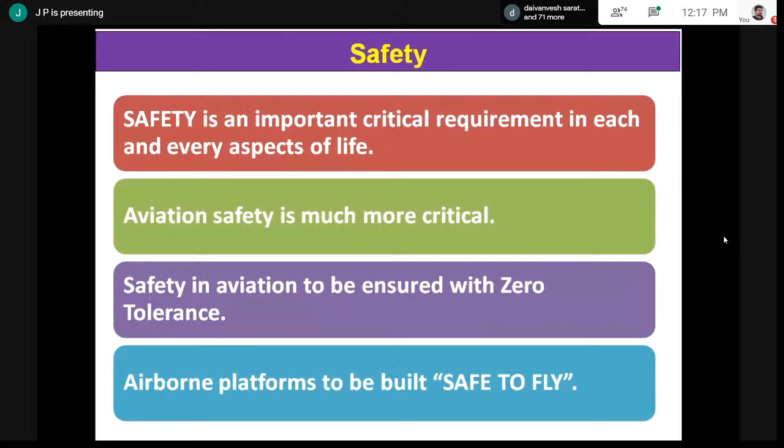The product must be airworthy. The product, in the sense of the aircraft or helicopter, it must be airworthy. Airworthy means fitness to fly. If you take our vehicle to the RTO office, two-wheeler or car, they certify your vehicle is roadworthy and give a certificate. Similarly, our flying vehicle, the aircraft or helicopter, should be airworthy, that is fitness to fly.

The product is to be certified by an external agency, meaning other than the designer, other than the manufacturer, other than the maintenance engineer. The external agency has to audit your design and certify the product.

The product shall be highly reliable and built with components of high reliability. Take today's Boeing 777: it takes off from Bombay or Delhi, goes to New York, about 19 to 20 hours of non-stop flight. Imagine what safety has been built in, so that similar safety has to be built into each and every system of the aircraft.

It requires a high degree of quality control. At each and every stage, there should not be any deviation without anybody's knowledge. That quality control is a very important stage in all aspects, right from design till delivery, and finally with the operation of the aircraft.

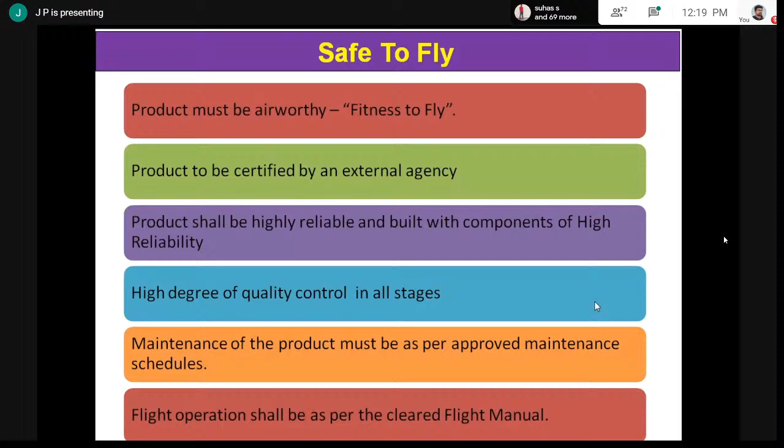Why airworthiness? I told you, if you want to ensure safety, it should be airworthy. Flying is a hazardous mode of transport, as you are all aware. An aircraft or helicopter is assembled with thousands and thousands of machined parts, and with thousands of machined parts, no machine can be designed which never fails. One day, something or the other will fail.

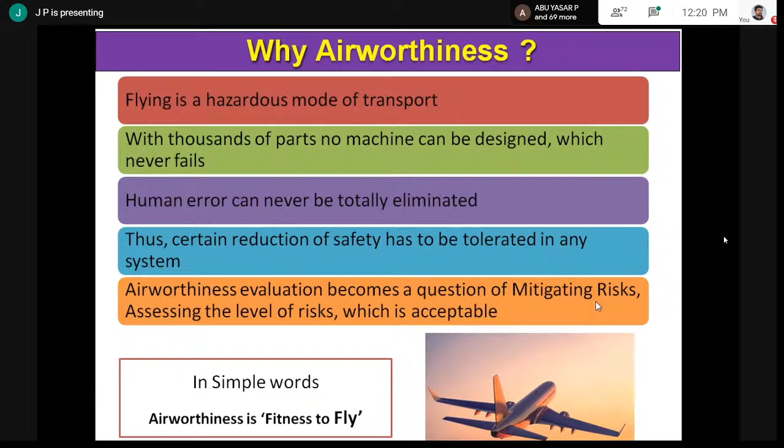And with any amount of systems in place, human error can never be totally eliminated. Thus, a certain reduction of safety has to be tolerated in any system, either in day-to-day activities or any other industry, or in aviation also. Airworthiness evaluation becomes a question of mitigating the risk and assessing the level of risk which is acceptable. In simple words, airworthiness is fitness to fly.

The international airworthiness agencies are the FAA in the USA, and the Ministry of Defense in UK, France, Russia. In India, for all civil aircraft, DGCA takes care of it. For military aircraft, the Center for Military Airworthiness and Certification, CEMILAC, will take care of the airworthiness and certification, and quality assurance is by DGAQA. What is CEMILAC?

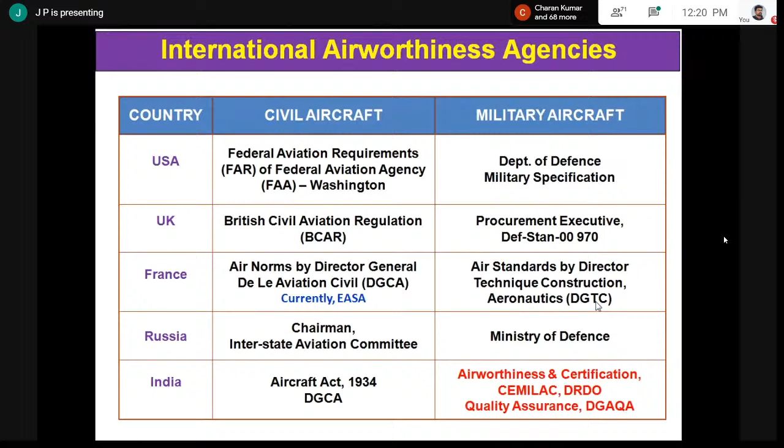The Center for Military Airworthiness and Certification is one of the DRDO organizations assigned with the responsibility of ensuring the airworthiness and certification of airborne systems for military use. Any system developed by DRDO or PSUs like HAL and BEL, or private organizations, has to be certified by CEMILAC before the product is inducted into military service.

There are 18 RCMAs under CEMILAC spread across the country, giving airworthiness coverage for certification activities. Systems developed by government organizations like DRDO or CSIR, PSUs like HAL and BEL, and private sectors, have to be certified by the RCMA and CEMILAC before use in aircraft, helicopter, and aero engine.

CEMILAC accords clearance even after giving a certificate, for life extensions, mid-life upgrades, and modifications of licensed-built and bought-out aircraft, helicopters, and aero engines. In India, there are several aircraft and helicopters that are built under license, built to print, and bought straight away. For those platforms also, CEMILAC has to give clearance to ensure the continued airworthiness in the above aspects.

CEMILAC and RCMAs adopt a concurrent certification methodology, meaning they work with the designer right from the project stage onwards for certification of all items.

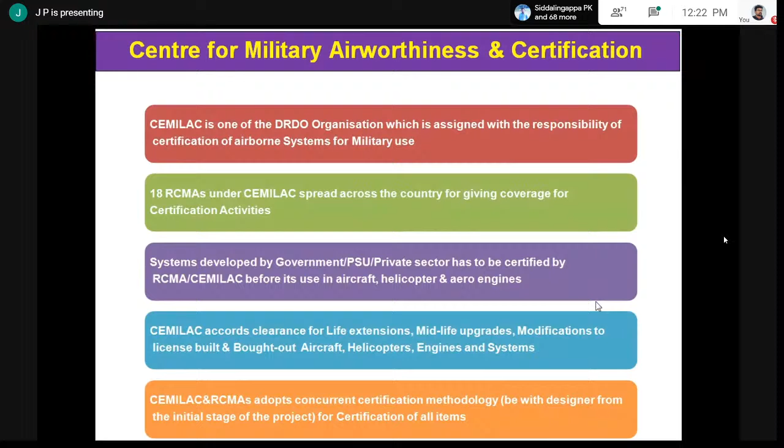There are 18 RCMAs located across the country giving airworthiness coverage for all developments happening at various centers. CEMILAC is the corporate office, located in Bangalore.

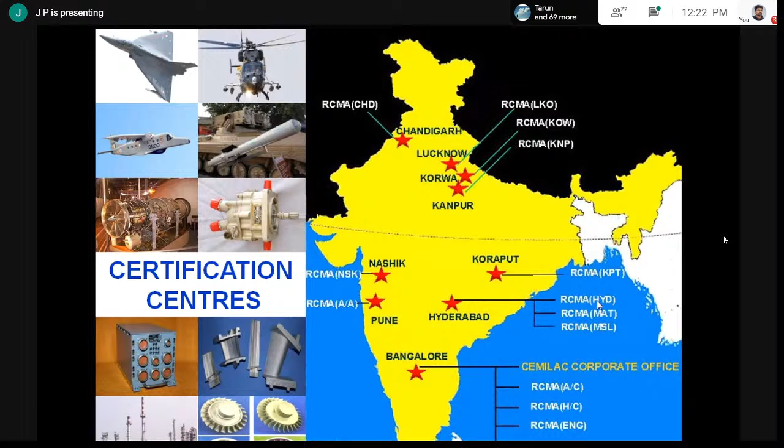What is the charter of duty? CEMILAC gives design clearance and certification for indigenously designed and developed aircraft, helicopters, and systems. Taking LCA, Advanced Light Helicopter, Light Combat Helicopter, Light Utility Helicopter, HTT-40 trainers, and the engines developed by GTRE and others — for all these products, CEMILAC has to give design clearance as well as certification.

Once certified and delivered to customers, CEMILAC ensures continued airworthiness till the product is retired from service. This continued airworthiness is ensured for indigenous aircraft like LCA, ALH, etc., license-built aircraft like Jaguar, MiG-21, MiG-27, Su-30, and helicopters like Chetak and Cheetah, and bought-out aircraft like Mirage 2000, Jaguar, and the presently inducted Rafale aircraft. When buying these bought-out aircraft, the technology is advancing in a rapid way.

Therefore, in order to keep the operational fleet up to date, you have to carry out modifications and upgradations, and for that also CEMILAC is giving clearance.

Due to commercial reasons, some bought-out aircraft are provided with a limited life, even though potential exists. So in order to utilize the full potential, we carry out some exercise and give life extension. The life extension clearance is accorded by CEMILAC.

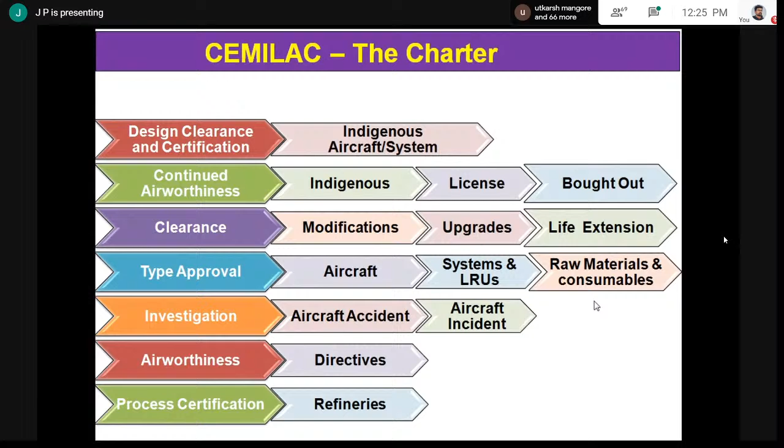And the Directorate General of Aeronautical Quality Assurance Organizations, DGAQA, is located in Delhi. Under the DGAQA, regional offices are located, and wherever CEMILAC is there, they are located too. Their aspect is quality inspection, conformance to standards, process, etc.

Quality control and acceptance of airborne stores. As I told you, quality control has to be ensured, and at each and every stage of development their involvement is there. What is quality?

Doing the job right first time and every time is the requirement of quality in production. If you do this, the product we are manufacturing, certifying and delivering will have high quality and high reliability.

This quality involvement and quality control leads to reduced levels of non-conformance and scrap, which results in higher productivity. If quality control is not applied at each and every stage, and only at the last moment you inspect and find it doesn't meet requirements, you reject it, and that becomes a loss to the management and everybody. So involvement of quality control from the design and development stage itself reduces non-conformance of the product.

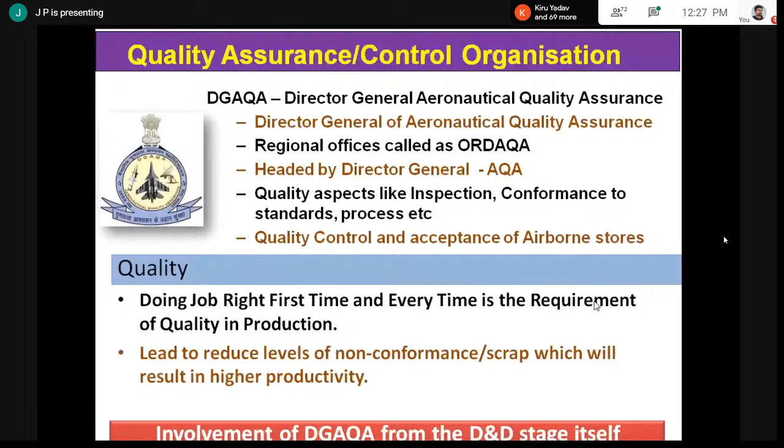I told you about safety. Safety means fitness to fly. Fitness to fly means the product has airworthiness. What is airworthiness? It applies commonly to a helicopter, aircraft, or any system. Airworthiness is defined as the capability of an aircraft, helicopter, or system to perform its intended mission. What is the mission?

If it is a passenger aircraft, it has to take the passengers and cargo, take off from Bangalore, go to the nearest airport, land safely and bring them back. That is the mission, within the cleared envelope and specified life, under all operating environmental conditions, with an acceptable level of safety and reliability. This is the definition for aircraft.

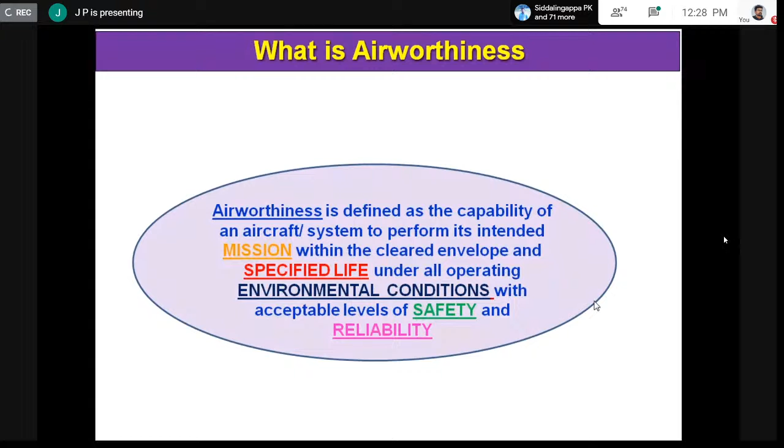There are some aspects: mission, specified life, environmental conditions, safety and reliability. All these things have to be ensured during design till it is certified. How are you going to ensure this? If we look at the mission, there are various activities required to see these aspects are met.

Mission requirement means performance and satisfactory function of the system. If you fulfill this requirement, you can say the system can perform the mission satisfactorily.

Specified life: if you see any aircraft or helicopter, you cannot use it permanently forever. It has got a specified life. If you see LCA, it is designed for a specified few thousands of hours of life. As and when it completes that, it will be retired from service.

Similarly, a passenger aircraft will be cleared for thousands and lakhs of flight hours. If you see Boeing 777, it takes off from Bangalore, goes to New York, lands within 4 to 5 hours, changes crew, and flies back. If you count the number of hours, it will be lakhs and lakhs of hours.

So for that, what do you have to do? You have to carry out endurance testing and fatigue testing to decide about the life.

The environmental conditions: the product you are designing, developing and using has to meet high and low temperature, high altitude, humidity, vibration, acceleration, environment, EMI/EMC, and lightning protection requirements. To meet all these requirements, the product being developed has to undergo testing under all these conditions.

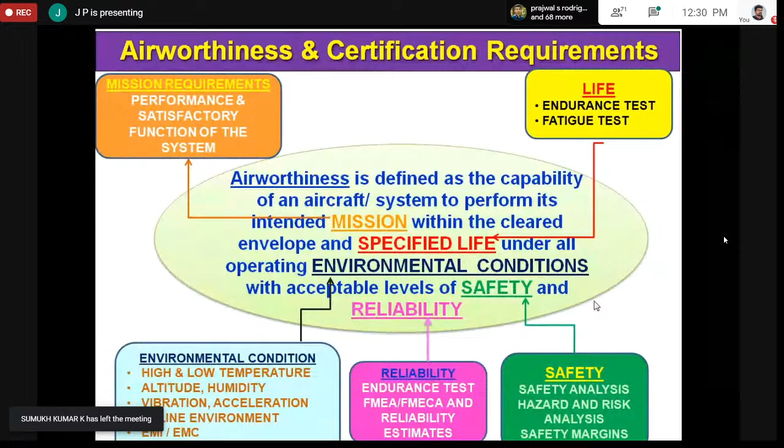Then safety, you have to carry out the safety analysis, hazard and risk analysis, safety margins, all those things. Finally, reliability, endurance of the product, FMEA, FMECA, and reliability estimates. By carrying out all these activities, you will say your product is airworthy.

If you see India, the dry and cold regions in Siachen go up to minus 55 degrees centigrade. Dry and hot region at Rajasthan plus 52 degrees centigrade. Humidity at the hot, that is 50 degrees centigrade and greater than 99% relative humidity. Sandstorms, salines, high altitude airfields like Leh and Siachen, heavy and continuous rainfall. The product what you are developing by DRDO, by HAL, is operating across the country, so it has to be cleared to operate in these adverse weather conditions.

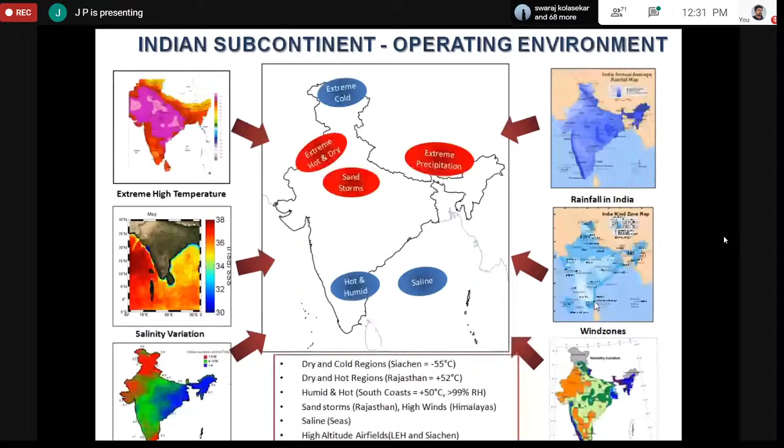For that, each and every system has to be exposed to this kind of extreme environment and tested to say the product is airworthy. Airworthiness is a continued capability of a product to perform satisfactorily and fulfill mission requirements throughout its specified life in the prevailing environment, with acceptable levels of safety and reliability.

Certification is a declaration of conformance to the standards and specification of the product. End of the day, when any system is cleared, the CEMILAC or RCMA will give a certificate. Airworthiness is the explicit declaration that the product, be it an aircraft or helicopter, is certified to be airworthy. If CEMILAC gives airworthiness clearance, you can say the product is airworthy, all safety norms are ensured, the flight is airworthy, safety is ensured.

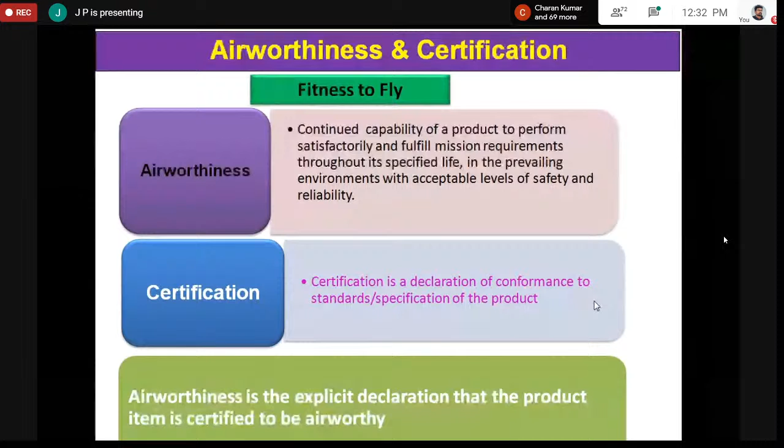How are you going to do all these things? If you see the methodology for certification, the requirements come from the end user. In India, that's the Army, Air Force, Navy and Coast Guard. In the form of a joint services qualitative requirement, a specification comes. This specification has to be converted - based on the requirement, HAL, DRDO, whoever has to develop an aircraft. All these requirements will be converted into a technical specification.

After finalizing the technical specification, the design evaluation starts. You are doing the detailed design - preliminary design, critical design - for aerodynamics, structure, systems, system integration, performance, and all the analysis like FMEA, criticality analysis, simulation, static and dynamic testing, software, IV&V testing and documentation. This goes on, and majority of the time, about 7 to 8 years, will take place.

You are designing a system, it undergoes a series of reviews, you have to manufacture a prototype and do the ground test and other simulation tests. The day it meets all your safety requirements, the regulatory agency will give the clearance for the first flight.

After meeting all the system safety requirements, when the prototype first flight starts, it carries out flight testing at various environments, as I told earlier, right from sea level to high altitude, various extreme environmental conditions - the flight testing is carried out.

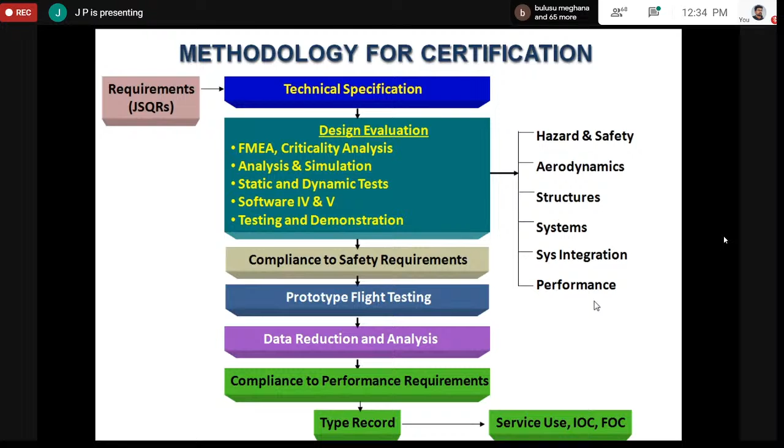The type record is submitted to the regulatory authorities like CEMILAC. Then they give clearance for service use in the form of Initial Operation Clearance or Final Operation Clearance. Based on this IOC and FOC, our services - Army, Air Force, Navy - will get the product from HAL and use it for safeguarding our nation.

I told you about the product life cycle - the conception, right from the requirement from the joint services, then conception, design and development, testing and delivery. Based on the clearance or FOC - Final Operation Clearance given by CEMILAC - you manufacture and give the product to the services. But the matter does not end there.

Thereafter, you continue airworthiness activities until retirement of the product. Whenever during operation some kind of problem comes, you have to repair the system, maintain the system. As technology advances, you have to upgrade the system to the latest technology, and finally, retirement.

So CEMILAC, the certification agency, shall be involved throughout the entire development, beginning with the requirement that comes from the services and continuing till the retirement of the aircraft, aero engine, airborne store, weapon, etc.

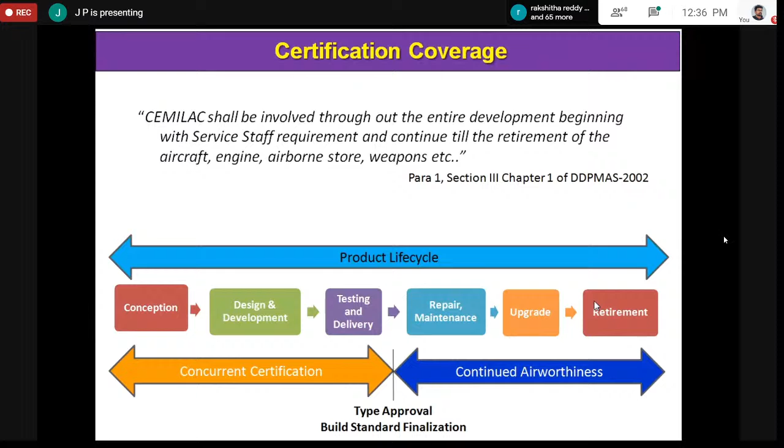Now, the requirement comes from the services. It goes to the DRDO organization, ADA, DPSUs, BEL, HAL, and private organizations. They are the design, development, testing, and manufacturing authority. The certification is CEMILAC, and quality control is DGAQA. Finally, it has to go back to the users, the Navy, Air Force, Army as operators.

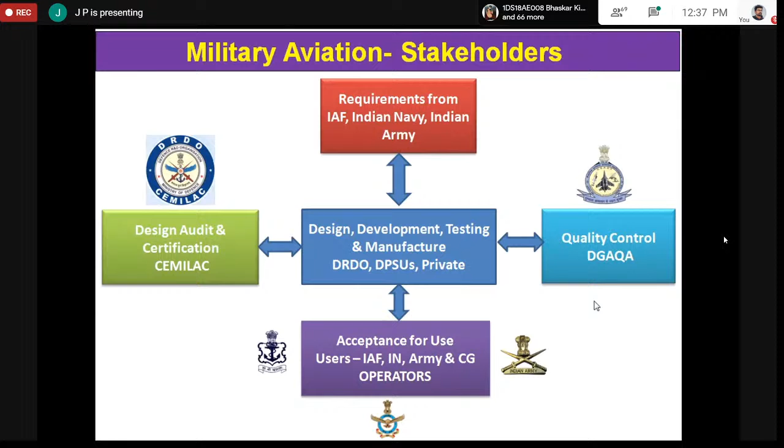Now, each and every organization has to play a role. Just because these authorities are available with external agencies CEMILAC and DGAQA, they cannot ask for more, and they cannot ask for less. All these organizations have to follow a guiding document, so that each and every organization plays within their roles. That is called the guiding document.

DDP MAS, the document on design, development, production of military aircraft and airborne stores. This guiding document talks about the roles and responsibilities of the designers, the manufacturer, the certification authority CEMILAC, the quality control authority DGAQA, the flight test agencies, and users and operators.

If anybody is deviating from this document, they can clearly say it is not as per DDP MAS, you are asking for more. This document is approved by the Secretary R&D DRDO and the Secretary of Defense Production. This is a guiding document being followed by each and every organization.

This document talks about concurrent airworthiness, indigenous design and development, licensed projects, bought out aircraft, development flight testing, and user flight testing.

This is volume 1. Volume 2 talks about software. Today, all our systems are software oriented, so there's a separate volume for software certification, and there is also DDPMUAV for unmanned vehicles.

Some time back, we released this document in 2002. It was available for sale at the English Book Store, Connaught Circus. When I was in helicopter, this document was purchased by many foreign countries.

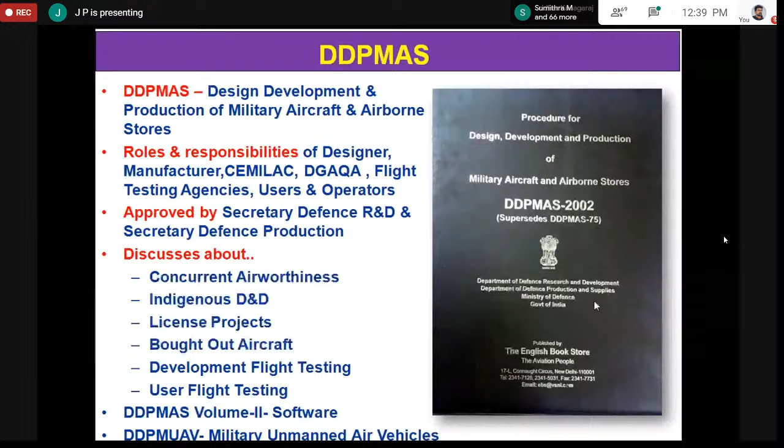It is being followed even abroad by those doing some kind of activities on our Indian platforms. This is the guiding document. It will be available in all the institutions wherever the design and development of aircraft and helicopters are happening.

Whenever you are developing any product, there are different stages. From the beginning itself, you evolve a route to certification. For anything, if you start, you have to go to the destination, there is a route. So there is a feasibility study on ASR, NSQR, GSQR.

Now with the advent of internet, services can go online and select what is best available in the country, and put it all together to ask for it. Finally, you have to see whether it is feasible to develop or not, because putting all the state of the art together, sometimes it may not be feasible. So there is a feasibility study on the requirements stipulated in the ASR, NSQR, GSQR.

Then that requirement is converted into a technical specification, which has to be approved by all stakeholders: the designer, the certification agencies, the regulatory agencies, and the user. There is no controversy even after 5 or 10 years as technology changes, because the technical specification has been approved by everybody.

Then the design starts: design evaluation, preliminary design review, critical design review, and various iterations. Thereafter, you start manufacturing your LRUs, the line replaceable units systems, and you undergo various levels of testing, system level testing and aircraft level testing.

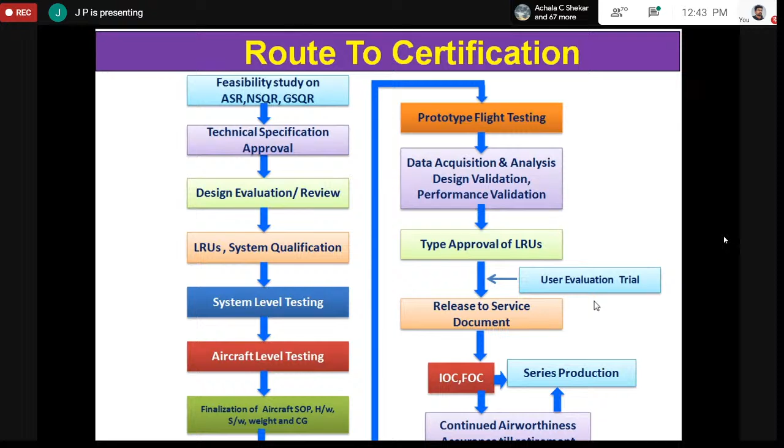Finally, when it meets all the requirements, the release to service document will be issued by CEMILAC, in the form of initial operation clearance and final operation clearance for series production. Based on the IOC and FOC, multiple numbers are manufactured and delivered to the Indian Air Force. And of course, the continued airworthiness assurance will start from there also, till the retirement of the platform.

Now, if you see any design criteria for the aircraft or helicopter, you have to design each and every system with reliability. Like I told you, Boeing 777s do 20 hours non-stop flying, and after a 4 to 5 hour gap come immediately back. So how much reliability has to be built into each and every system?

And the damage tolerant fail safe. Nowadays we are using several composite structures. The composite structure is called damage tolerant. So a little amount of fail has to be tolerated. That's for damage fail safe.

High TBO life. Each and every aircraft, the day you build it, has to undergo an overhaul within a scheduled interval. That is called designing for high TBO life.

Then any product has less vibration, less noise, and crashworthy features. In the fighter aircraft, whenever you are in an emergency, you try to save the aircraft. If not possible, you can eject it — you can leave the aircraft, come out, and land safely.

Whereas in the helicopter, no, that is not possible. You have to eject, but that's very cumbersome — you would have to eject the rotor and everything, which is not possible. So when there is a high level impact, the helicopter structure and the seat will take care of the crash. The crashworthy features are built in.

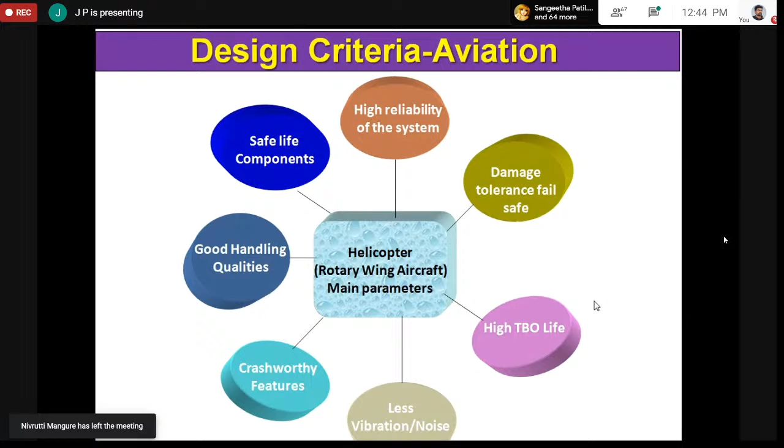Good handling qualities are applicable for fixed wing and rotary wing, and safe life components. You are familiar with fail safe and safe life. This is the design criteria for any product in aviation.

Now, airworthiness in the design. When you are launching any design, whether it's a passenger aircraft, a fighter aircraft, or a helicopter, you have to estimate the load coming on each and every component accurately. If your estimation is wrong, it will show up in a different form of failure at a later stage.

So the starting point is your estimation of the loads using the wind tunnel and other tools and software. That will be very, very accurate. And after this, you ensure airworthiness parameters during the design itself.

When you go to this, you might be familiar with the factor of safety. If 100 kilos is coming on any component in the actual scenario, you design to a design load with a 1.5 factor of safety. Thereafter comes the margin of safety.

This margin of safety, in any analysis or any data, should always be positive. What is margin of safety? It's the capability of the structure — the ratio between the capability and the stress, minus 1. Okay, it should always be positive.

If we see any construction, it has got casting, welding, joints, and composite structures. So in the design itself, you have to take care of that. If you are using ultimate tensile strength, whenever you are using a welding structure, you have to apply the weld factor, casting factor, joint factor, and the environmental degradation factor for composites.

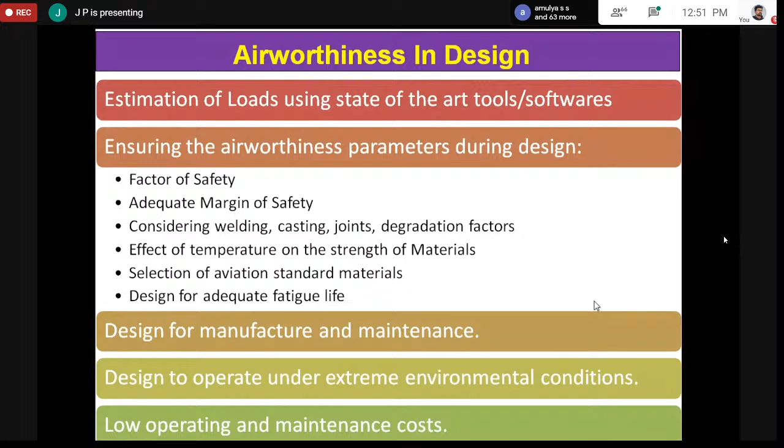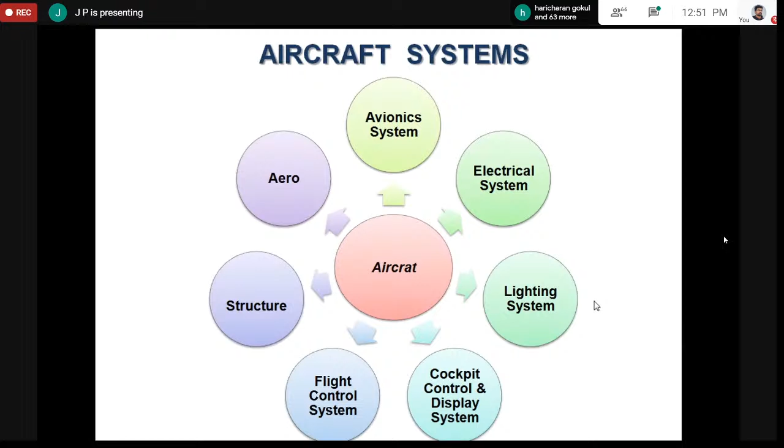If you see the aircraft system, any aircraft has varieties of systems: aerodynamics, structure, flight control, cockpit and control display system, lighting system, electrical system, avionics system, power plant, fuel system, hydraulic system, landing gear, brake management, environmental control system, life support, armament, escape system, brake parachute system. The whole aircraft is divided into individual systems.

Each individual system has to undergo component level, subsystem level, and system level qualification testing. When it meets all the requirements, they are all put together and then you do testing. That is the airworthiness requirement. Today's LCA PC has 365 systems installed on the aircraft. You cannot build an aircraft installing all the systems and directly go for the first flight. No, each and every system has to undergo qualification testing individually.

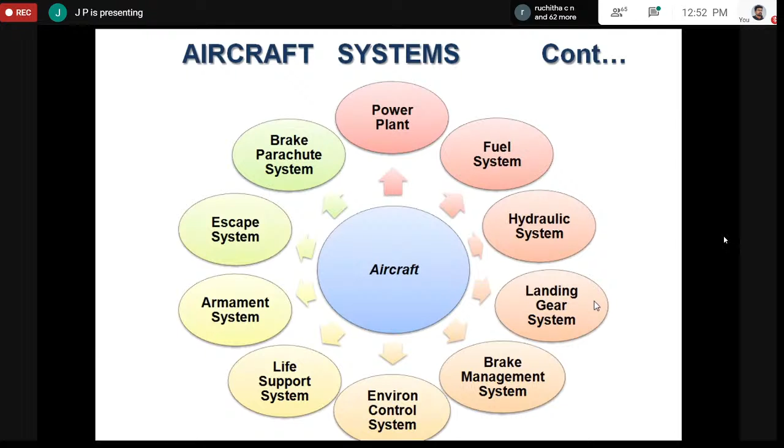The day it meets the requirement satisfactorily, CEMILAC will give the approval. That is how you maintain airworthiness and safety.

I'll tell you a typical procedure followed in the aeronautic houses for certification of a mechanical system. First of all, in an aircraft there are some critical systems and some non-critical systems. I cannot ask for very stringent qualification testing for non-critical systems, and similarly I cannot do very minimal qualification testing for a critical system. This is very important to understand.

In a system of an aircraft, the various systems, the structure, the classification of the items, whether critical or non-critical, is applicable for a system, for LRUs, for components, and each and every component. To classify the system, we follow the system safety assessment approach for classification of the item.

What does the system safety assessment approach say? A critical item is one whose failure will affect flight safety. Very simple - if in an aircraft or helicopter, while flying, any failure of the system will affect flight safety, then you know what will happen. That is a critical system.

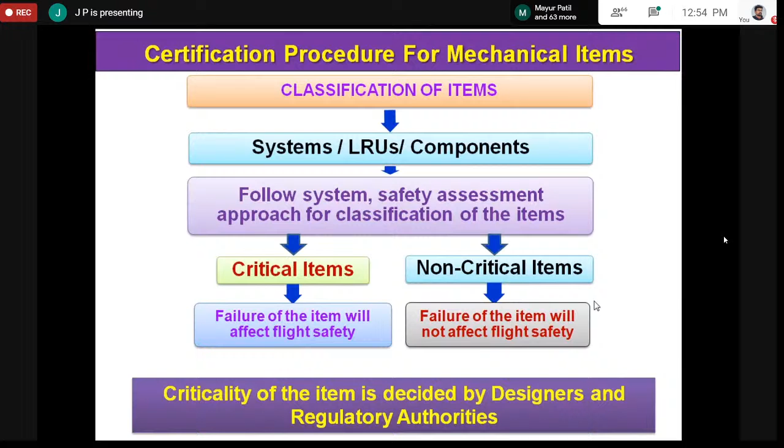The criticality of the item is decided by the designers who design the system, and the regulatory authorities - I mean the CEMILAC. They decide which is critical and which is not critical, and what kind of qualification testing a critical system or a non-critical item has to undergo. It is a mutual understanding between the designers and the regulatory authorities.

Now I'll give one example. This is CEMILAC on the left side, the certification agency, and the contractor - could be DRDO, HAL, BEL, or a private company. Both of them first have to understand what is the requirement of the system.

What is the system for - say, a landing gear. What is a landing gear supposed to do? A flight control system, what is it supposed to do? Once you understand the system requirement, you have to evolve the specification and get approval of the specification.

Once the specification is approved by both the designer and the certification agency, there will not be any confrontation at a later stage. Once the specification is approved, the design starts, along with analysis of the design.

There's the preliminary design review, then the critical design review, then parallelly they prepare the drawings - what material to be used, what process to be followed. All these things will be approved by CEMILAC, and finally they evolve the qualification test schedule.

It is a concurrent approach between the designers and the certification authority. They sit across the table, discuss, and come to an agreement. That's why at each and every stage, both parties are in close interaction with each other.

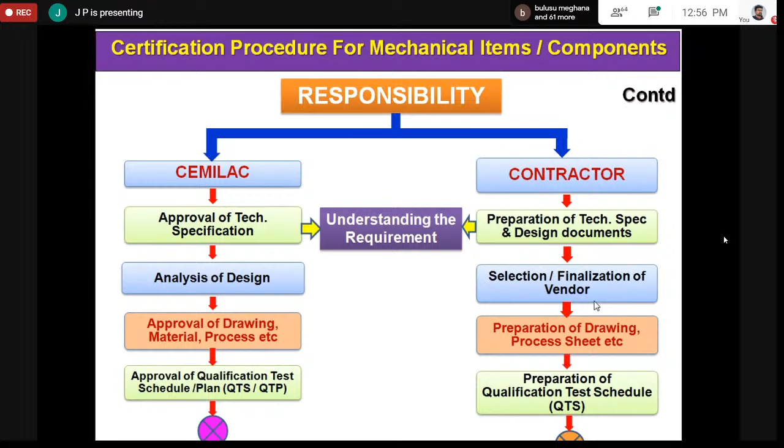The DGA will come into the picture. They will see the prototype drawing or process approved by CEMILAC between the designers and CEMILAC, and the first sample article produced by the manufacturer will be inspected by quality control, the DGA.

I mentioned that involvement of DGA right from the beginning will reduce non-conformance. That is why their involvement is there throughout.

Then, once they clear it, the sample will be tested at the approved test house. Any developer, whether HAL or any private vendor, may not have all the facilities under one roof for carrying out qualification testing - they can go outside wherever the facilities are available.

Nowadays, many private labs have NABL accredited laboratories with their own test facilities. The product can go there, get tested, and receive a certificate. This is coordinated between the quality DGAQA, and based on the test, after carrying out all the tests, the contractor will prepare a qualification test report.

Again, it has to go through DGAQA coordination, so that DGAQA is fully in the picture. He will ensure the sample is manufactured as per the drawing, ensure the product is tested as per the qualification test schedule, and ensure the test report prepared by the contractor is in line accordingly. He will coordinate, and the document - the qualification test reports - is submitted to RCMA. RCMA, the RCMA CEMILAC, will go through the test reports.

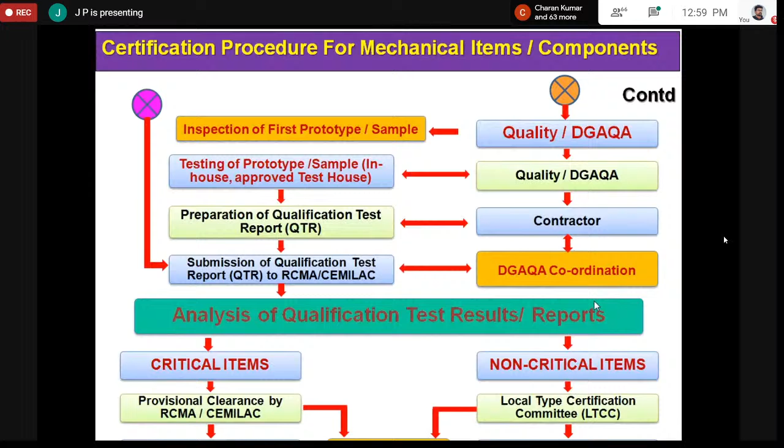This is everywhere, the methodology and procedure is the same. Only the variable is the requirement in the qualification test schedule, depending on the critical item. The number of tests may be less or more, purely based on how critical the system is, but the procedure is the same. Today, modern systems are mostly avionics and software oriented, and they are also safety critical and mission critical.

If you see the LCA DFCC, the digital flight control system is a critical system. If you see any safety critical item, any weapon delivery or other system, that is mission critical. If you see the procedure now, it is the same everywhere.

Specification, design reviews, finalization of drawings, bill of material, finalization of QTS, SOF, environmental screening, qualification testing, limited qualification testing, analysis of QTR - everything is the same for mission critical as well as safety critical systems.

But the software certification has to be carried out much before the first flight testing for safety critical systems. Whereas for mission critical systems, based on functional testing, they will give the clearance, and after completing flight testing, you can do software certification also.

That is very critical, because today in an AFCS flight control system, this is software driven. If at all there is any bug in the software, you know what the implications are. So the software also has to undergo testing.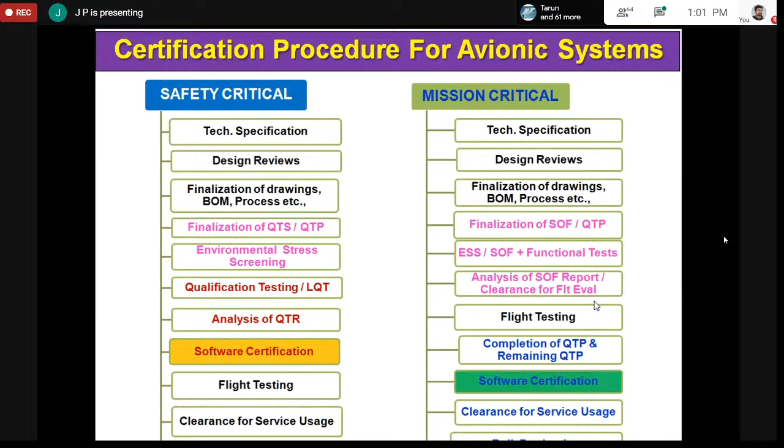A separate volume is there for software certification, then flight testing, again the clearance for service use and bulk production. Here also, it's the same procedure being followed for avionics systems that are critical, say mission critical. This is the software certification process.

In the software domain, some of you may have come across these kinds of requirements - various requirements for software development, software certification, and documentation. This also depends on whether it's safety critical at level A, level B, level C, or level D. There's an international standard, RTCA DO-178B, that talks about various levels of certification for software, and this is being followed by all aeronautical institutions in India.

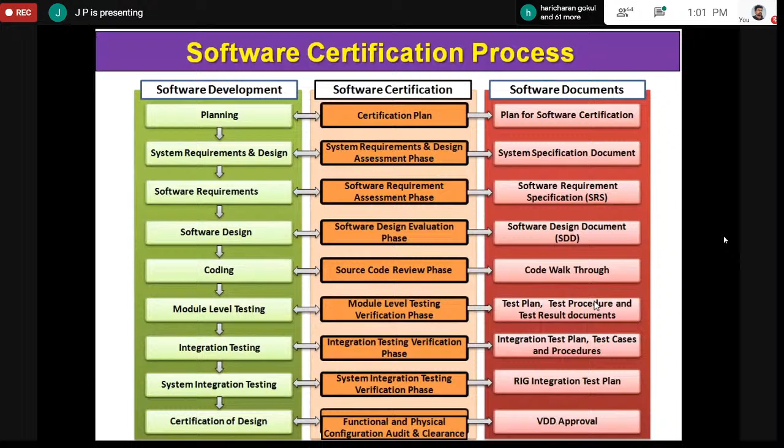I told you about all these different stages - right from the requirement that comes from the services, then those things get converted into specification. Based on the specification, you estimate the load, do the design, analysis and production, and then do the ground testing.

From the ground testing, you evaluate the flight allowables, and when it is meeting the safety requirement, CEMILAC will give the first flight clearance for flight testing, and thereafter flight testing will start. You measure the various loads coming on critical components and compare with the design, whether the measured loads are as per the design or not, and compare with the analysis, and finally for the entire product you see the design validation and documentation, and finally the operational clearance to the services is issued by CEMILAC.

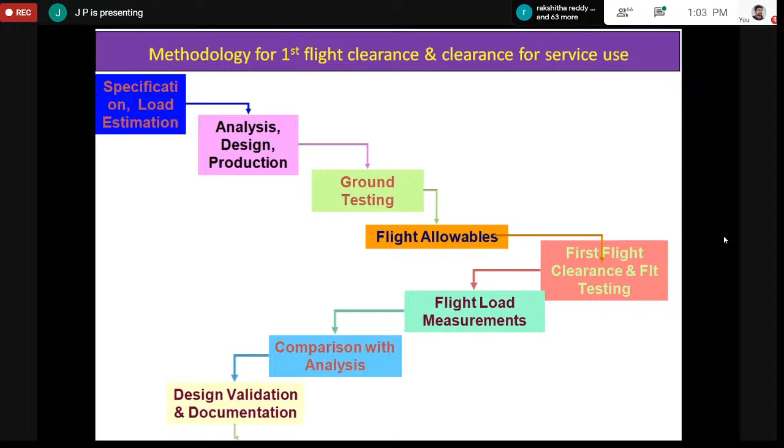Now, what does the clearance talk about? Each and every system will be given clearance separately. If it's a landing gear system, the landing gear itself will have its own independent clearance. So what CEMILAC does is give clearance to the part number, part name, and the clearance talks about the details of the approved drawings with issue numbers.

The drawing also they will approve, and once you get the clearance, you cannot change the drawing on your own - the specification of the material, alternate material to be used, all of that. During the prototype, you may use one material, and it will undergo all the qualification testing.

You will meet the requirement and get the clearance from the certification authorities. During bulk production, when you go to market, the material may not be available, but you cannot use the material as per your own choice. The drawing also specifies what material is to be used, and what the alternate material to be used is. If both are not available, you cannot use any material on your own.

Thereafter, during bulk production, when the DGAQA comes, they will say, show me the drawing - what material you are supposed to use, what material you used, please show me the records.

You have to use the correct interlinked material. Then the process, what kind of heat treatment, coating, finishing to be followed during manufacturing of all the components. Acceptance criteria, permissible manufacturing tolerances.

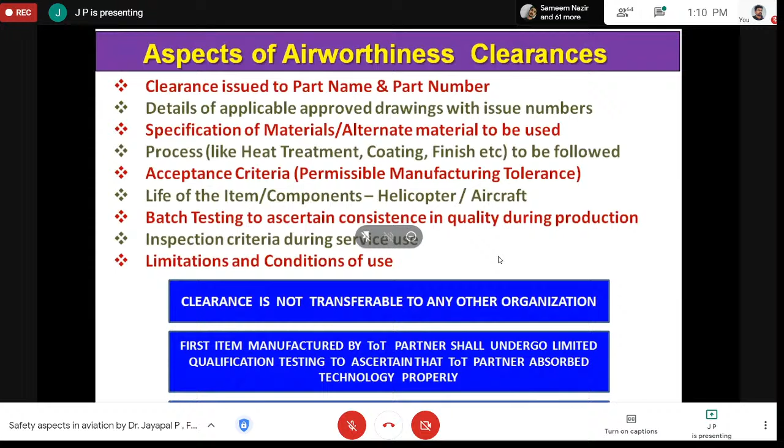Even though it is a rivet, it has to undergo qualification testing to the requirement as per the standards, and a clearance will be issued to the rivet. Because if the rivet you are using in a critical system fails, the entire system will be in jeopardy - jeopardizing safety and reliability. So what I want to say is, in aviation, each and every component is very, very important. If the rivet you are using in a critical system is critical, the same rivet used in a non-critical system is non-critical.

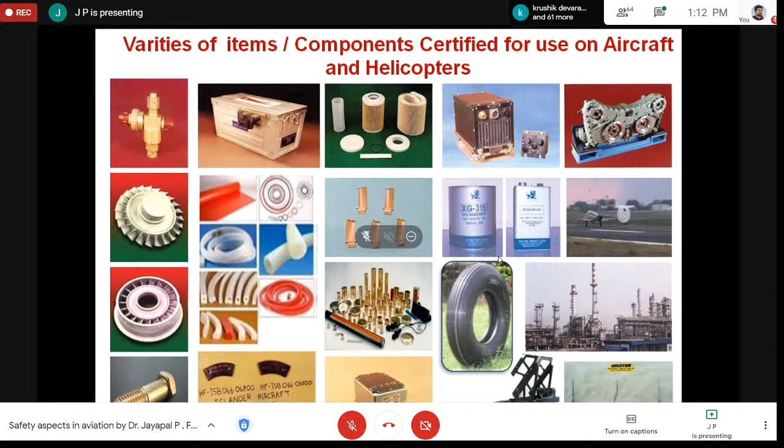Similarly, I mentioned that aircraft, helicopters, upgradation - everything has to be certified.

During a bought-out aircraft, or a license-built aircraft like Jaguar, MiG-21, MiG-27, Su-30, and even a bought-out aircraft like Mirage 2000, when you want to introduce a system, the spare may not be available from the original equipment manufacturer in the foreign country. Just because it is not available, you cannot keep the aircraft on ground. So you have to develop the spares and systems. Yes, you are allowed to develop with the use of HAL or private organizations. The item which is developed has to be certified by CEMILAC for use by services.

The procedure exists, and we have cleared so many systems, several systems for bought-out and licensed aircraft. For everything, CEMILAC has cleared, so as to ensure that the aircraft or helicopter is never on AOG or in want of spares or systems from abroad.

If you see Indian aviation - over 6 decades of experience in India, HAL, DRDO and CSIR are the organizations involved in development of aviation products. If you see our olden days aircraft, it is made out of wood and cloth. Today, the aircrafts are manufactured out of composites, carbon composites.

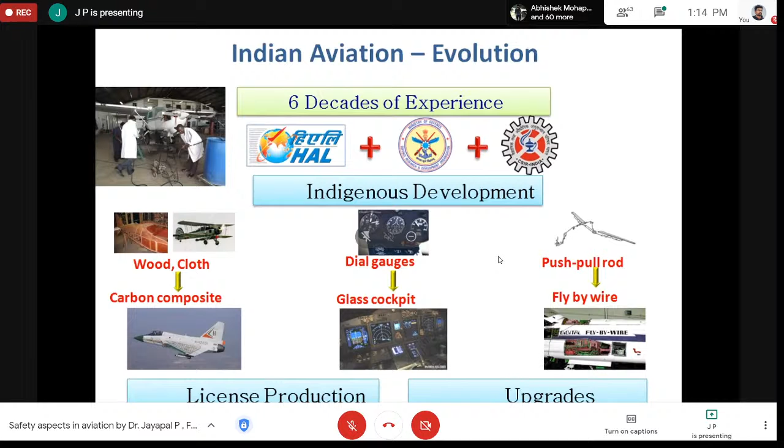Let's see, in 1958 Indian aviation started. In 1958, we were using bought-out aircraft - Canberra, Hunter and Packet. And we have migrated to license production.

License production means the foreign country will give the drawing, the material, the manufacturing process, the assembly process, procedure - everything. We have to build to print and then manufacture to the approved drawings. That is called license production - they give everything, and some of the key systems you will be supplying.

So from there we are migrating and expanding. Today we are in a position to design our own aircraft - AEW&C, Light Combat Aircraft LCA, AWACS, ARC, ALH, LCH, LUH - all of these systems, aircraft, UAV, Rustam, everywhere. Indian technology has advanced so much that we can design and develop to our own services requirement.

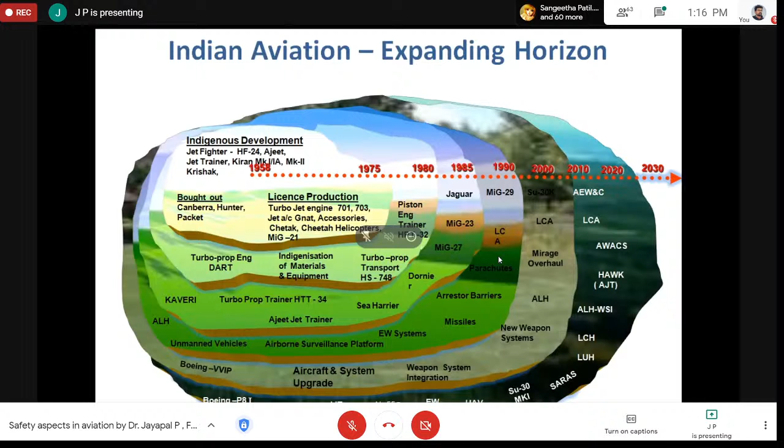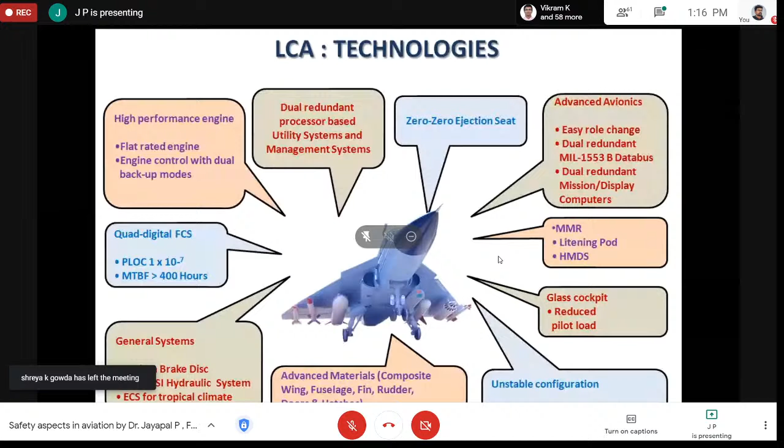The prestigious Light Combat Aircraft, designed and developed by ADA in coordination and association with HAL and many various organizations within India, has been designed with state-of-the-art technologies like zero-zero ejection seat, advanced avionics, glass cockpit, advanced composite materials, and quad digital flight control systems. Whatever technology available today for a 4.5 plus generation fighter aircraft has been developed and incorporated in the LCA.

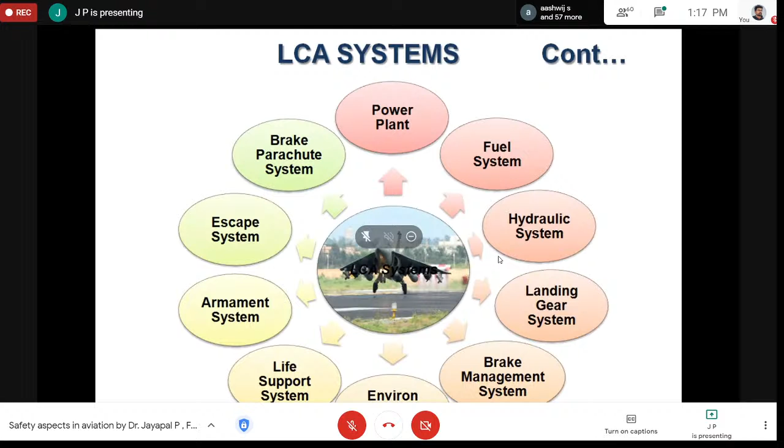I told you the systems, all other systems you have seen earlier. These are the systems: different power plant, fuel system, hydraulic system, landing gear, brake management, life support, armament, escape system, brake parachute - all the systems have been tested individually in each and every rig, ground testing.

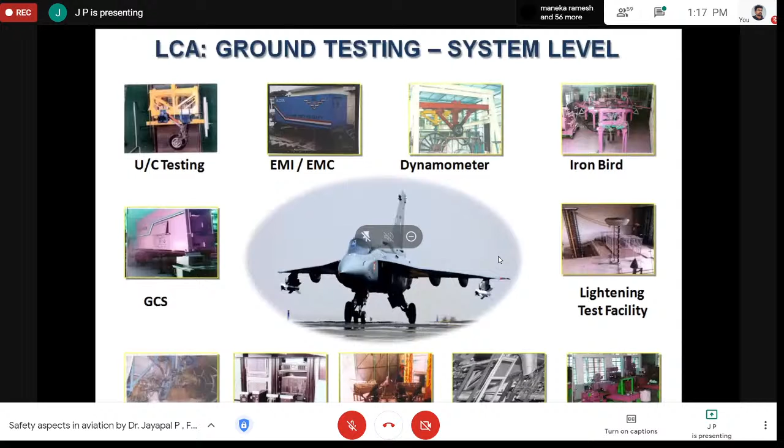As a landing gear separately, Ironbird, lightning facility, each and every system has been tested individually. End of the day, it is meeting the requirement as per the specification. Once it is meeting the specification, CEMILAC will give clearance for the individual system. Thereafter, all the systems have been integrated on this aircraft and the ground testing at the aircraft level.

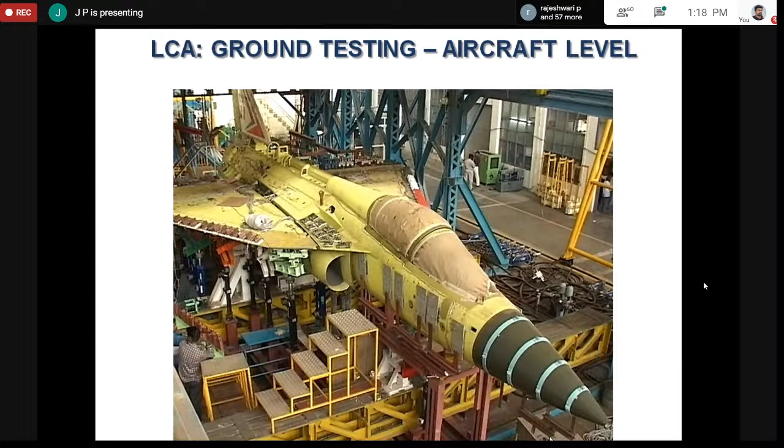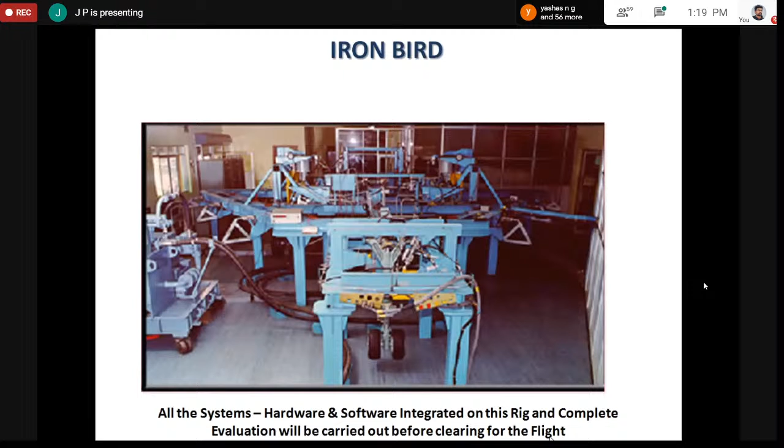Meeting the safety requirements - so once it is meeting the safety requirement before the first flight, CEMILAC will give clearance for the first flight. The flight took place in the year 2001. Thereafter, the series of flight testing is going on: high altitude testing, air-to-air refueling, the bomb release.

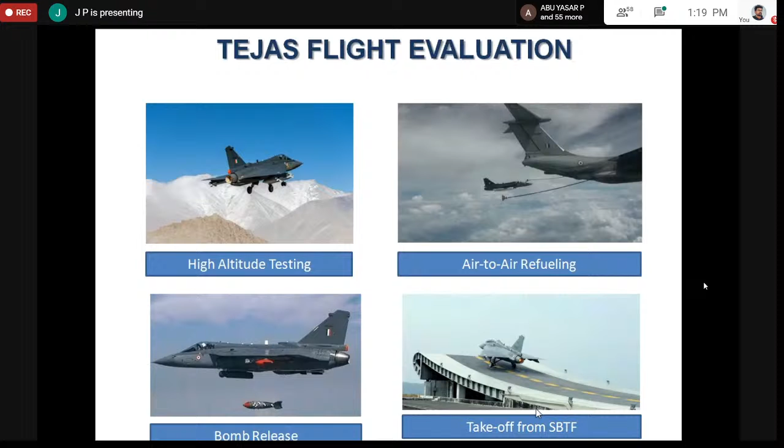It is for the naval version. It has to land on the ship. Before that, it has to be proved on the takeoff and landing from the shore-based test facilities. It is one of the requirements.

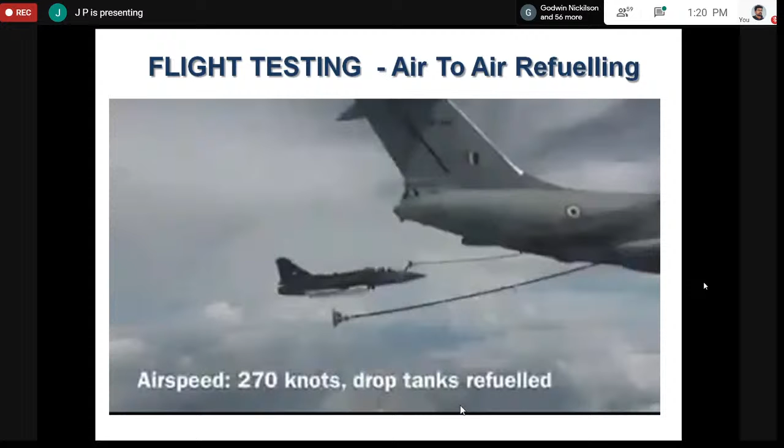Any fighter aircraft, the endurance is limited because the fuel carrying capacity is limited. With that fuel, he has to land for refueling. So to increase the endurance, the mother aircraft in the air, while flying, it will fill the tanks. This is LCA getting fuel from the mother aircraft IL-78 in the air.

So I told you flight testing of the aircraft and helicopters. I told you in the beginning, you decide about the standard of preparation of the aircraft, what is the hardware that has to go inside, what is the software, what are the critical and non-critical systems, and weight. Now, when you are doing the flight testing, you have to do the flight testing at the minimum to the maximum of all of it.

And tomorrow, when you are getting the clearance from the CEMILAC also, that clearance will go to the service also. You will say what is the permissible takeoff weight maximum and what is the permissible minimum landing weight. All those figures will be written in the flight manual. The flight manual will be approved by CEMILAC and the pilots will follow only the flight manual in the squadrons.

When you are doing that, the different all-up weight of the aircraft has to meet all the user requirements. That's why the different all-up weight, different CG conditions - forward CG, mid CG, aft CG - and different speeds, different attitudes, and within the flight envelope of the aircraft design, the VN diagram, the velocity versus load factor diagram, it has to touch the corner point of that flight envelope and carry out the testing within that envelope.

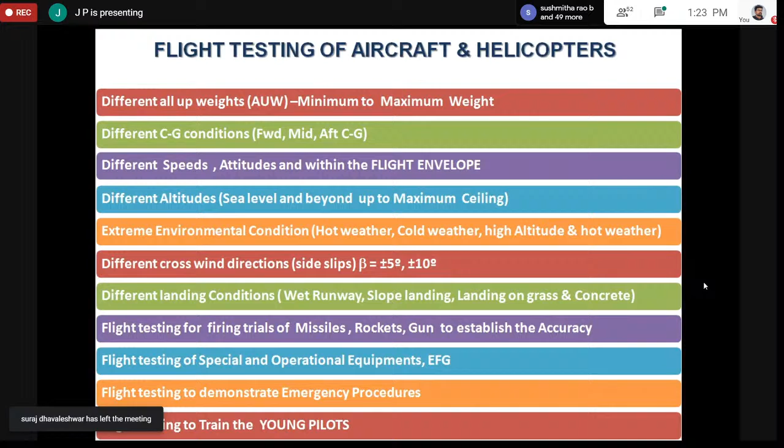Flight testing of the special equipment, flight testing to demonstrate emergency procedure, and flight testing to train the pilots. After carrying out all these, the Light Combat Aircraft was given final operational clearance and released service document for Mark 1 on 20th February 2019 during the air show.

This is a certificate issued by HAL, ADA and CEMILAC. Based on the certificate only, the user will operate the aircraft as per the guidelines stipulated in the released service document.

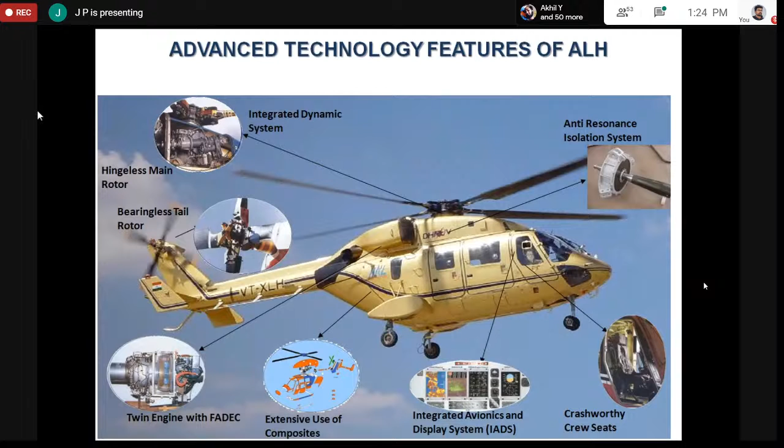Similarly, one of the successful products is the ALH, also indigenously developed with state-of-the-art technologies. I was involved in the project for about 23 years, and I told you about the gearbox.

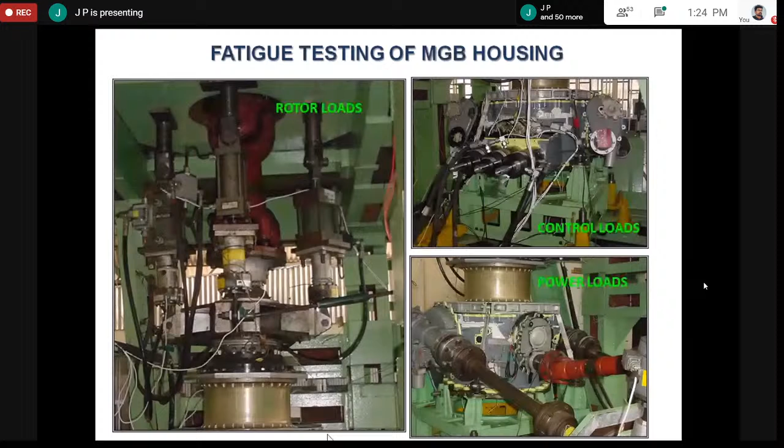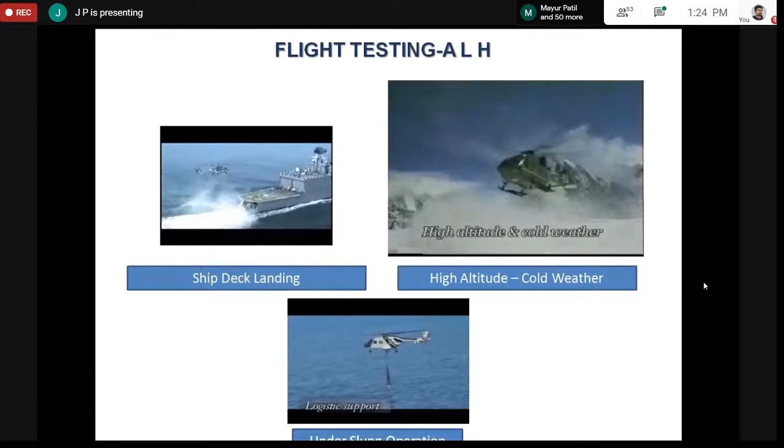This is the flight testing. High altitude cold weather trial. It is landing on the ship.

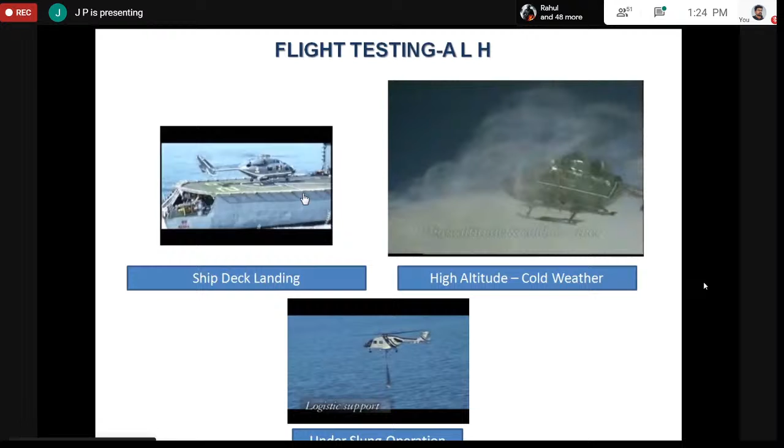And today the prestigious Advanced Light Helicopter designed by HAL is in service with all the services, doing extremely well. These are all the products certified by CEMILAC: Light Combat Helicopter, Advanced Light Helicopter, Light Utility Helicopter, AEW&C.

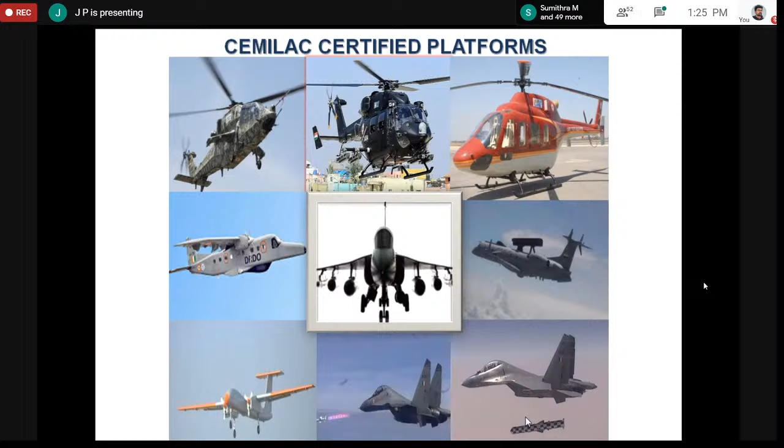LCA, DRDO operating testbed. This is Astra missile firing from Su-30, the integration of BrahMos missile on Su-30, firing trial. CEMILAC has contributed extensively in the integration of the missile and firing from the Su-30 aircraft.

Now, having told you about excellent design, excellent manufacturing facility, excellent quality control, finally, maintenance of the product is very, very important. Even with an excellent design, better quality, and a highly reliable product, we cannot ensure safety if it is not maintained properly as per the maintenance schedule. Follow the maintenance requirements stipulated by design and regulatory authorities strictly.

There is daily maintenance, weekly maintenance, monthly maintenance, yearly and hourly overhaul. Carry out major servicing or overhauling of the system within the time schedule, replacement of items, and use correct consumables. Adherence to the lifing document, replacement of components and items, and proper documentation of the work carried out for proper traceability in the event of any accident or incident tomorrow. You should be in a position to trace back what you have done on the systems.

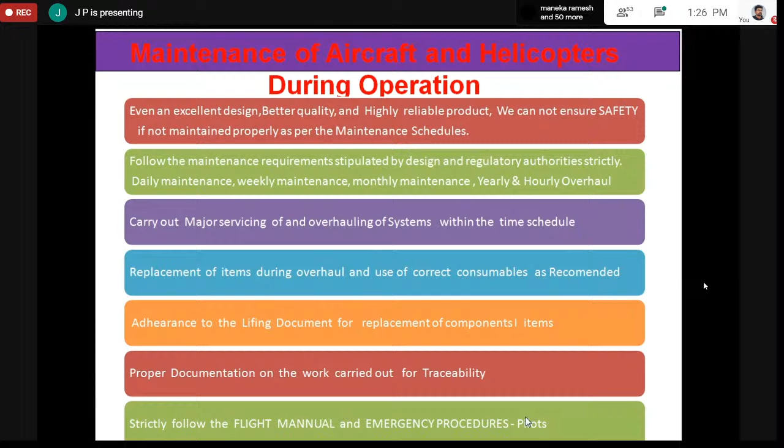Strictly follow the flight manual and emergency procedure. This is for the pilots.

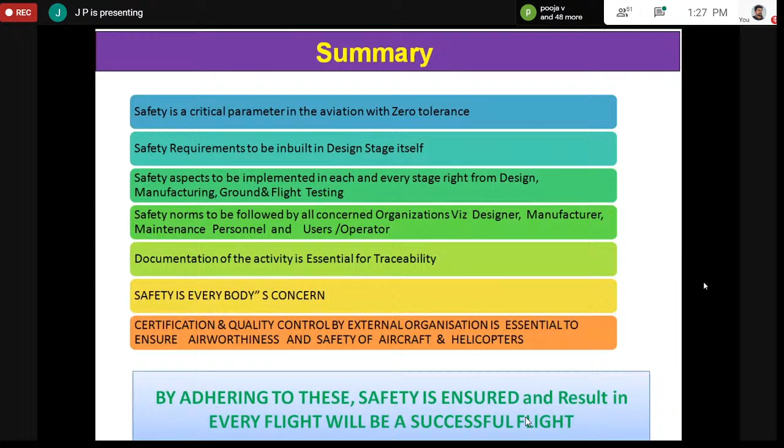In summary, safety is a critical parameter in aviation with zero tolerance. Safety requirements need to be built in at the design stage itself. Safety aspects have to be implemented at each and every stage, right from design, manufacturing, ground and flight testing. Safety norms must be followed by all concerned organizations: designer, manufacturer, maintenance personnel, and finally users and operators. Documentation, as I told you, is very essential. Safety is everybody's concern.

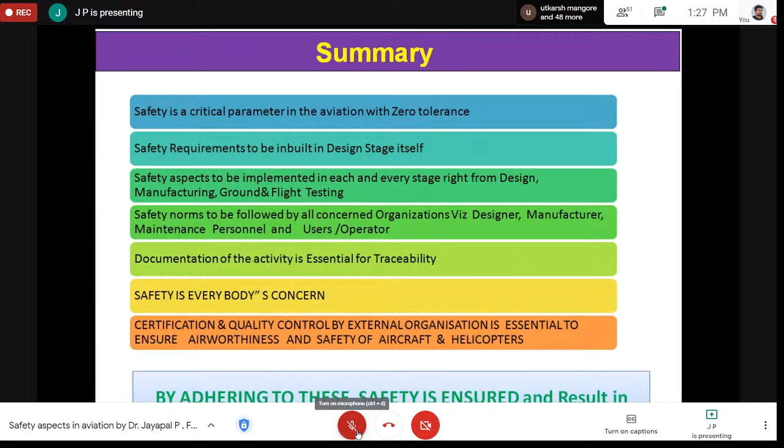Certification and quality control by an external organization is essential to ensure the safety of the product, I mean the aircraft and helicopter. This is very, very important. Always a third party comes and audits your system, and you will come to know a lot of non-conformances. That's why, for an aircraft, external agency certification is very much essential. By adhering to this, safety is ensured, and the result is that every flight will be a successful flight. Thank you very much.

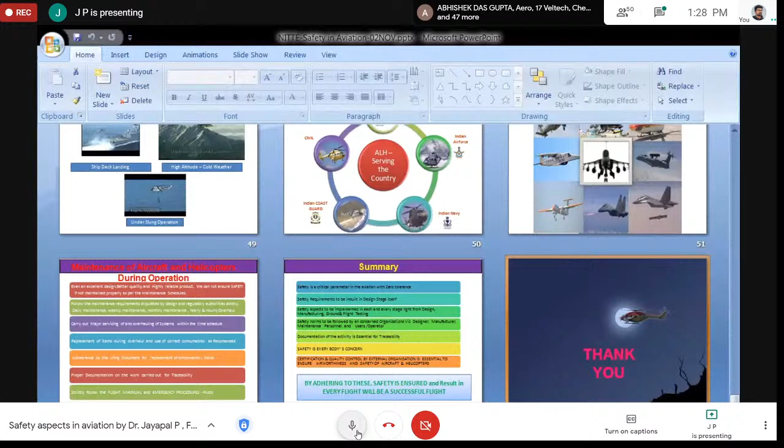Sir, a few participants have some queries related to this particular session. No problem, they can ask now also. Even as Dr. Tengli told, anytime they have got any clarification, they can contact me. I am ready to clear anybody's doubt. Okay, so a few participants have asked questions in the chat box, sir. We request you to address them. Yes, you read it out.

Sir, what are all the materials used for aviation, like for this certification? What is the difference between commercial and aviation materials? In aviation, you are using aluminum alloy, titanium alloy, steel, composite material, etc. Yes, the same material is available commercially too, as commercial material. But you cannot use commercial material in aviation. The reason is that the properties of the material, your ultimate tensile strength, yield strength, and percentage of elongation, need to be within a very, very close bandwidth.